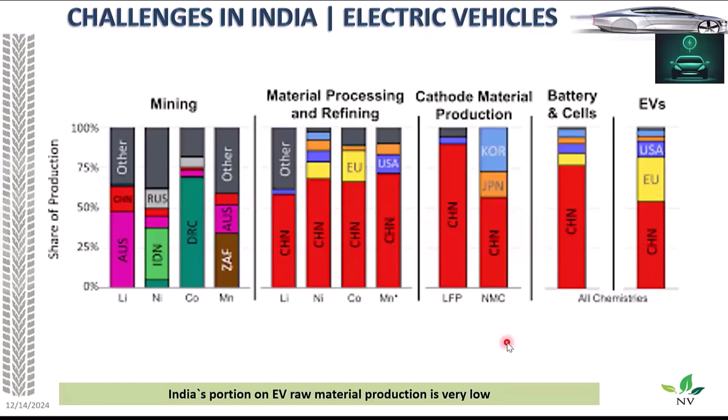Of course, in other aspects EV has a better advantage, but not in materials availability or content coming from our country. And from EVs there is also some pitching happening for fuel cells. We will discuss fuel cells in detail. In a fuel cell we also have a battery as one of the main components, and it requires hydrogen to run the vehicle, which is not predominantly available commercially in India for automobiles.

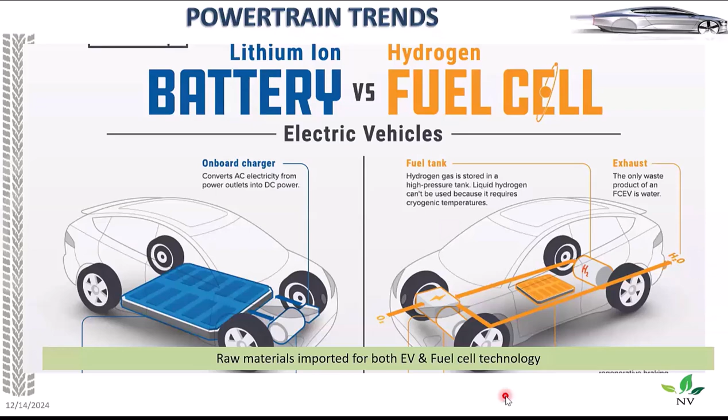And we also have the fuel stack, which is mostly rare materials again, and 100% it is not coming from India. So when we try to move from EV to hydrogen fuel cell, which is more green, are we there in India on raw material? It's again a big question mark. Whether we can develop the technology or the raw material for the fuel stack is also a big question. So let us summarize what we spoke.

We have the IC engine, the internal combustion engine, running on diesel and petrol. On the other side we have EV, and let us discuss five aspects: raw material, economic growth for India, the vehicle cost we purchase, and the total cost of ownership, for example if I run it for 5 years, where are we? As development or research activity, do we know this technology to develop it? And whether it's eco-friendly, because we are also speaking about pollution and air quality concerns in India.

So starting from raw material, as I hinted, we don't have most of the components, basically the battery segment of it. Of course, the chassis, materials, tires, tubes, we have it, but the main raw material of EV, which is ores, we don't have. But if you say 100% of ICE engine components, we have it in India. Let it be from smaller components to bigger components, from metal pieces to the chip portion of it, we have it in India.

Then economic growth: if I keep importing, is the economy going to benefit? Maybe earlier I brought it from the Middle East for ICE engines. Maybe tomorrow I'll get it from New Zealand or China. So this is what it's going to be. Probably we will do a small assembly portion of it, but it is not green yet.

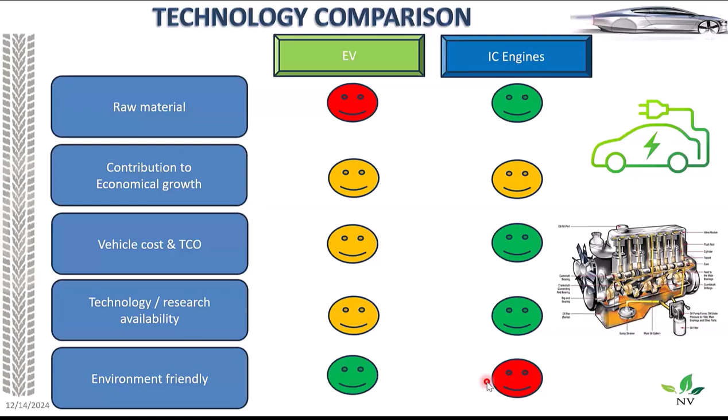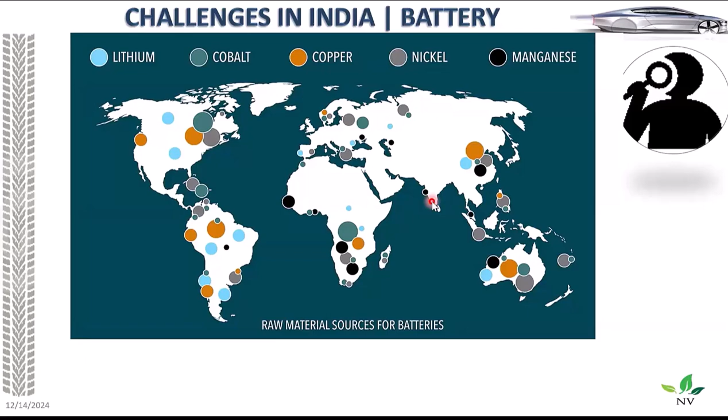So again, as we spoke, battery materials are not there, but this data says where they are. Slightly of manganese we have, to some extent. If in future we come up with aluminum batteries, we may have it. But the core materials that today are required for a battery are not in India. So they are probably coming from different parts of the globe. So this is where we have concern even in future for EV.

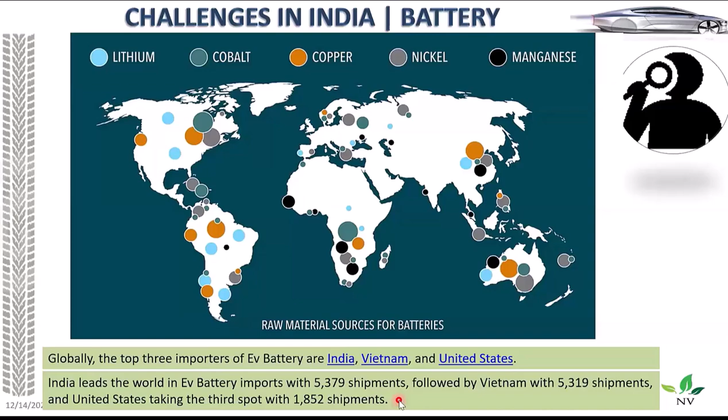If you see EV battery imports, India ranks top in importing, followed by Vietnam and the US, which means that we are again the top importers in the world for batteries. And other than this, we also have a lot of shipments coming from various parts of the globe to meet our today's electric vehicle requirements.

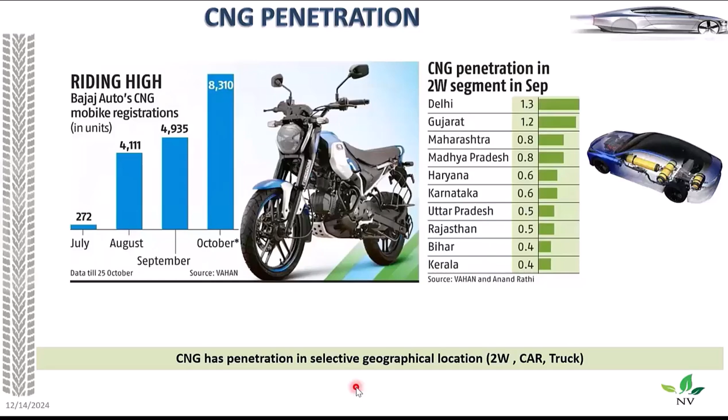On a lighter note, we might have seen that we are also slightly moving, from two-wheelers to passenger cars, to CNG. It is getting into pockets of the map. CNG is picking up, and the latest one is this particular two-wheeler. So it's a good sign, but the question is, are we having CNG as a replacement for diesel? I think this will take a long way, and we also have constraints in doing it. But yes, CNG is one which is budding.

Okay, so now we spoke about the challenges of fuel. We spoke that EV is good, but what is the concern with EV, and what the future is if you want to make it better. So now, what is India looking at to be self-reliant on fuels? We know we cannot become a Middle East country to get more oil. We cannot change it. So our government, under a scheme, is trying to see which fuel India can produce on its own.

So this particular Ministry of New and Renewable Energy, the MNRE department, continuously works on whether we can do something towards that. So they started a mission, and they also have a vision for it, and there is a clear target which they set, and there is micro-level activity which they are planning. For example, they have to start producing green hydrogen in a reasonable number from 2030, and there is also a plan for how to generate it.

We'll look more into it, and there is also very clear technology which they are aiming for to meet this particular requirement. Of course, it's not only the government, it is also the alliances coming from other parties. So this particular scheme is an initiative which has started, but this seems to be the kind of thing the government is banking on for the future.

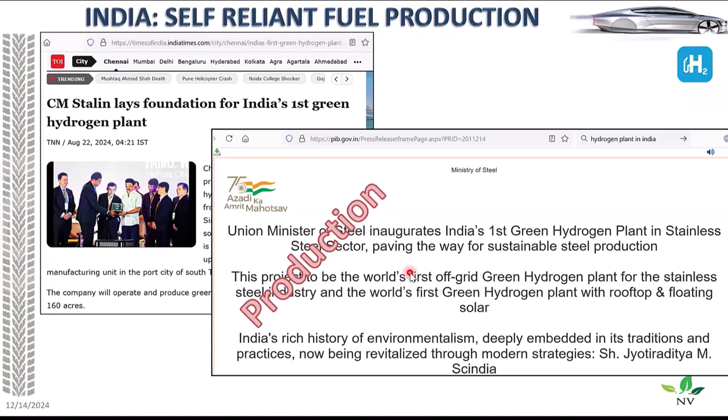But this doesn't end there, and we know the impact of what the Reliance and Adani groups are trying to make in India. Coming from Reliance, they have started a series of development R&D centers.

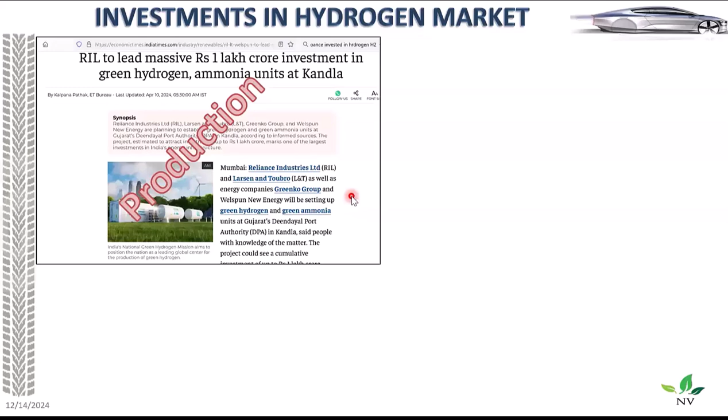They focus on two things. One is production of gases, second, especially green hydrogen gases. The second is developing vehicles so that they can run on green hydrogen. This has started from Reliance, and they have already started producing a set of vehicles in collaboration with other companies.

So now we are going to produce it, and fuels have stabilized to say, for example, closer to 100 rupees for both diesel and petrol. The promise, based on the basic understanding of this process and the investment, is that Reliance is promising they can give probably per kg of hydrogen at $1. So $1 is probably less than 100 rupees. This is something we can say is cheaper per kg if you compare, and it is very reliable for the future. And this is going to be 100% in India, not imported as it is today. So this is the promising content which Reliance has started contributing.

As I hinted, this is only one portion of it. Reliance has invested huge amounts, has technology tie-ups, and is also promising the government that they can deliver hydrogen at this cost.

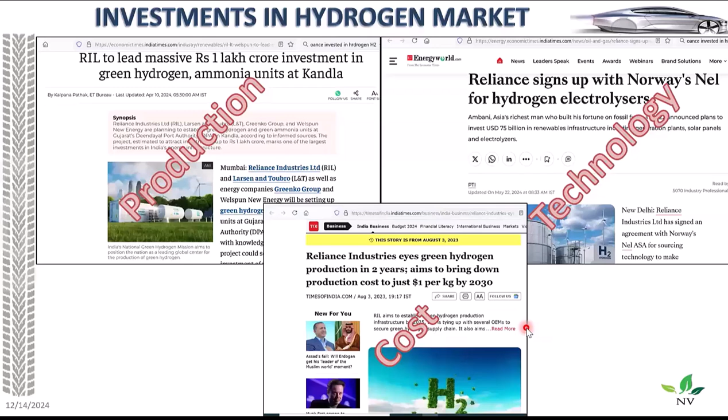On the other side, as I hinted, the other big player in the Indian market is Adani group. They also have similar plans, and have promised they will also be able to do hydrogen generation in India. So this is one case. In addition, since Adani has a lot of other businesses, they will try to use their natural gas plants, where they are already masters, to generate hydrogen.

So basically, hydrogen as a gas can be taken from various sources. We speak of green hydrogen, and on the other side we're speaking about hydrogen coming from natural gas. So various technologies are possible, and we'll also understand what this really means for production. This is a second player with a promising entry, and now these two are among the top businessmen working on gas and fuels for India. So this is where we see this particular supply is going to kick off, and we will have a self-reliant India.

Okay, so now coming to hydrogen, we know this is hydrogen, H2. So basically we are taking it from the electrolysis process, as simple as that. Say 2H2O with some energy, we can split into 2H2 and O2, and our area of interest is H2.

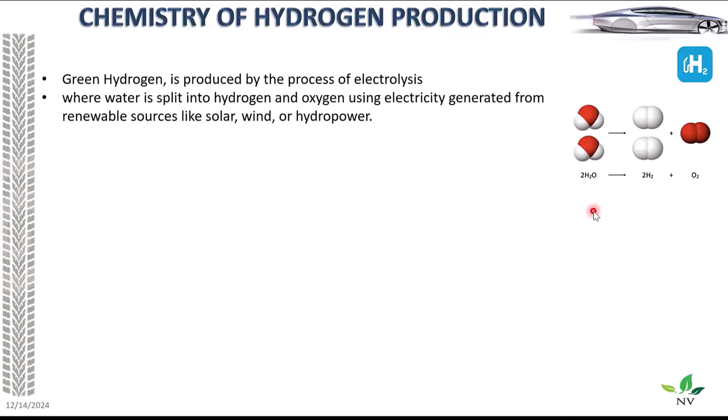This is basic chemistry which everybody is trying to work on, and this is almost the same technology which Reliance wants to procure from European countries. The reason behind it is efficiency. They need mass production and a high volume content coming from this particular electrolysis process. So the technology transfer is happening in the background.

So what is the aim now? For example, we get renewable energy because for the electrolysis process we need energy. Reliance is planning to set up yards where they can generate current from electricity from solar and wind, and the electrolysis process can do this job, but it needs energy. As I told, this particular tricky process where it will get a profitable hydrogen generation, this is coming from Norway for Reliance as of now.

So hydrogen will be produced, and this can be transported to any part of India in trucks. This is the area which they are working on, and probably this particular hydrogen can be used in various means for automobiles.

Key to notice, we know that hydrogen combustion can happen, and we have oxygen enormous in the ambient. So the end product is going to be water and electricity. So end of the day, in a fuel cell, it can be electricity or power, and we are going to use it for hydrogen engines. So the output is not going to be anything other than water.

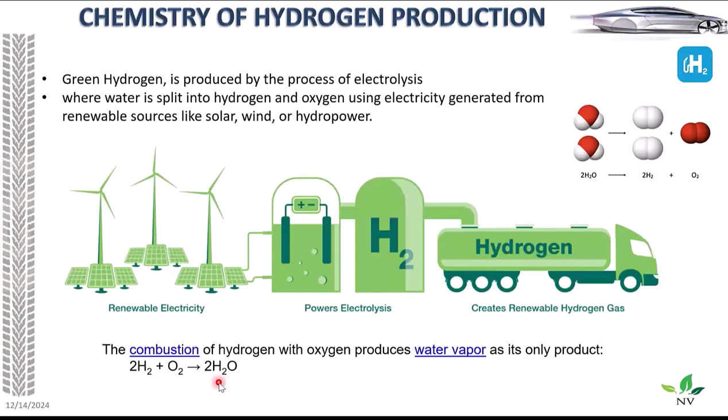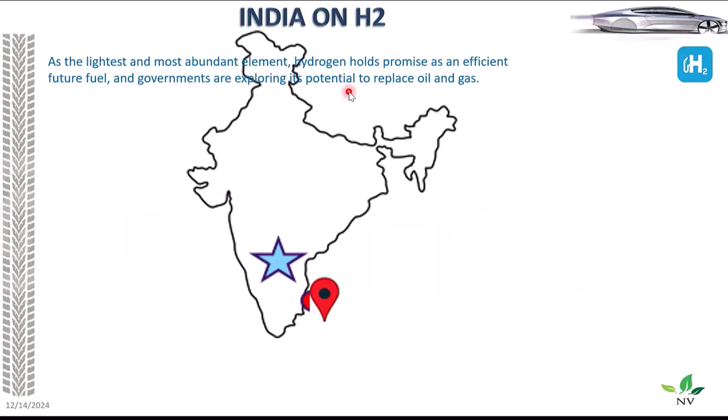Okay, so now coming to hydrogen, as I told, we are trying to explore it, and it is one of the potential ways to replace our today oil and gas requirement, or mostly about the import. And we already use hydrogen. We know very well, all our rockets are powered by cryogenics, and this particular concept is there for the rockets or for the space requirement. So we are not new to it.

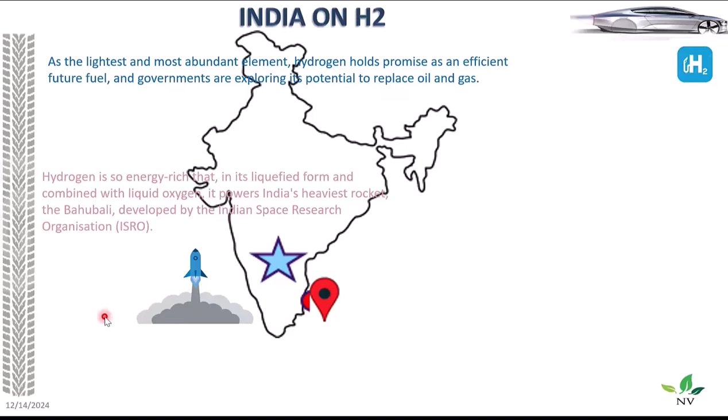Probably we are trying to migrate, or we are trying to use a similar modification for automobiles.

And coming to the properties, it's very important. The reason is this particular hydrogen is lighter, colorless and odorless. Why I'm hinting at this is, say we have hydrogen used for our vehicles, we are going to use it for day-to-day use. This colorless and odorless gas should be handled with care. And since it's a lighter gas, more lighter compared to other gases, especially what we use today for automobiles, this is going to have issues when some leakage happens. So this is one caution point, I will touch upon this later.

So now the question is, if I want to use it for hydrogen vehicles, there are two options. One is I can use it as a fuel cell, hydrogen powered fuel cell, or I can use it for hydrogen powered internal combustion engines. In principle both are possible, but the question is which particular technology is going to help, also for future sustainability from the raw material point of view, or from the economy point of view, or a scalability point of view. So both of these are competing now for the future, and the government has done some evaluation.

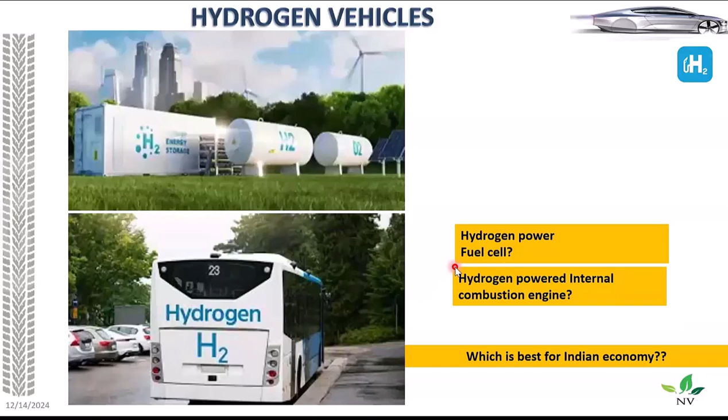We'll also touch upon that. Before going to what is the benefit out of it, probably you might have heard this from other speakers in the past, I'll try to touch upon it quickly.

So fuel cell is that we need hydrogen and oxygen. There is a fuel cell which is a stack available with a lot of catalyst inside. If we pass this through the fuel cell, then what we get is electricity, which can be used to run the motor, and as I hinted, the output will be water.

So this particular electricity will be used, like say, then after electricity comes in the vehicle, it will be like an EV. So now the difference between EV, electric vehicle, and fuel cell is, in the electric vehicle we will charge the battery. Here we'll have a comparatively smaller battery, and will fill the hydrogen gas. So on the go, if you keep filling hydrogen gas, this particular onboard generation of electricity will happen.

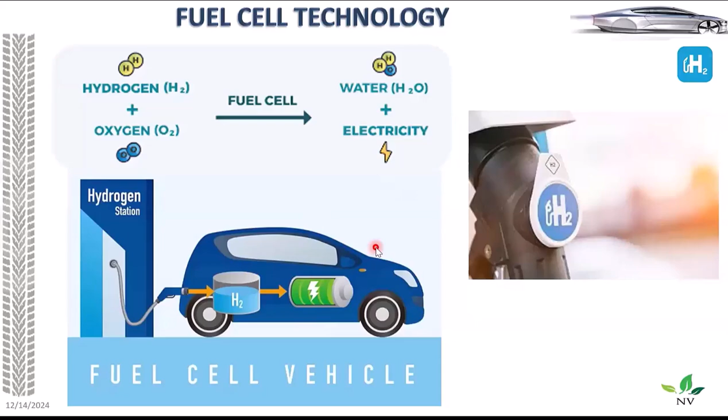This particular technology uses hydrogen, probably in future supplied from or manufactured and produced from India. But some limited quantity of EV is also built into the fuel cell. Of course, when hydrogen is available and we have better minerals for battery, probably this is one of the best options for the future. But it doesn't end there.

The complexity of the fuel cell goes slightly high. For example, I have hydrogen which can come from India, then it goes to a fuel cell where electricity generation happens. Today we don't have the technology or materials to produce it here, so it goes more as an import, but this can help in generating electricity.

The electricity will be converted to DC-DC, or it can be converted to AC based on the motor principle we use, and there will also be a battery to store it. So the generation goes to the battery, and electricity from the battery powers the motors driving the vehicle. When the battery drops voltage or we don't have energy in the battery, the hydrogen gas is again used to produce power.

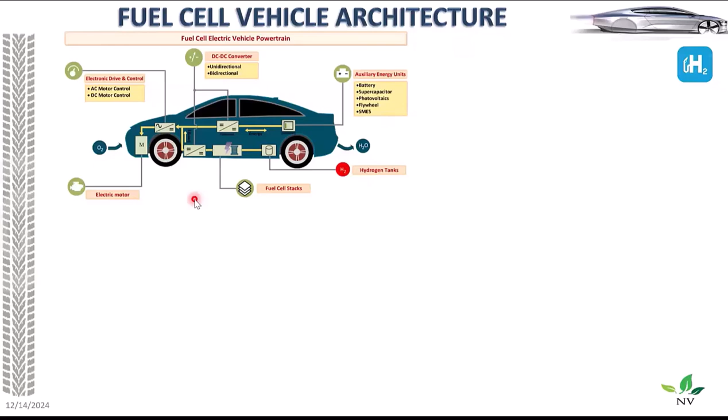That's why I hinted this particular vehicle is half a kind of hydrogen vehicle, but the other half operates purely like an electric vehicle. In some countries this is available at an initial level, not mass production, and mostly Western countries are going in this direction, seeing it as one of the promising options for eco-friendly vehicles. So with EV we keep charging it, but here we keep filling hydrogen and it acts as an EV - it's a hybrid of hydrogen and electric vehicle.

The West is more focused on it, and Toyota's product is one proven product which is commercially available today - a technology demonstration plus practical end-user application where it can be sold to the general public. But as I hinted, this is only an initial level of vehicle development, on a limited scale, which is still promising.

So what about India now? If we are able to bring this to India, probably when we have hydrogen, it's just a matter of having a better environment for control, and also better utilization of the fuel, which is hydrogen.

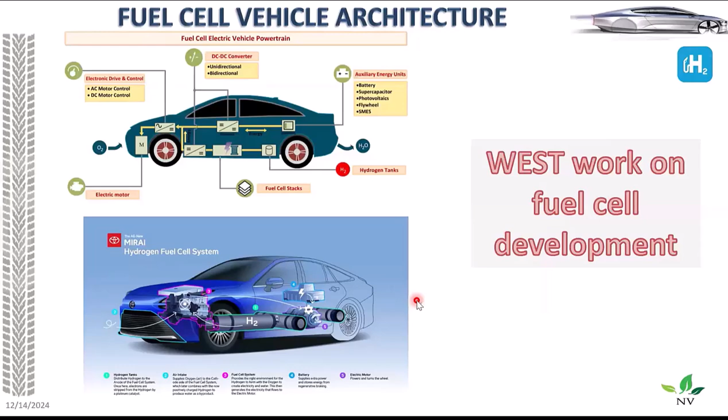I will not go deep into it, but I will quickly hint what this particular technology means. We have two things here - as I hinted, the basic chemistry is we need hydrogen and oxygen, and the fuel cell will convert this into electricity. The layout looks slightly complex, but I will put it in a simpler way.

The green color is the fuel, which is the hydrogen tank, and what you see in white on this side is the air - so air and fuel get in. We need some more for this particular synthesis, we also need some air, so we'll have a bigger size turbocharger like what we have today, and both contents go into the fuel cell.

What I'm highlighting here is the fuel cell, or we can say it's a fuel cell stack. This fuel cell stack is going to take both hydrogen and air together, and it's going to generate electricity. It also needs a level of control there.

So we'll have a microcontroller or onboard computer to regulate this whole process. Like today we have an engine control unit, in future we'll have a fuel cell control unit regulating it, along with other required sensors to monitor it. This fuel cell generates current, and this current can be used for the electric motors in the fuel cell vehicle to run them.

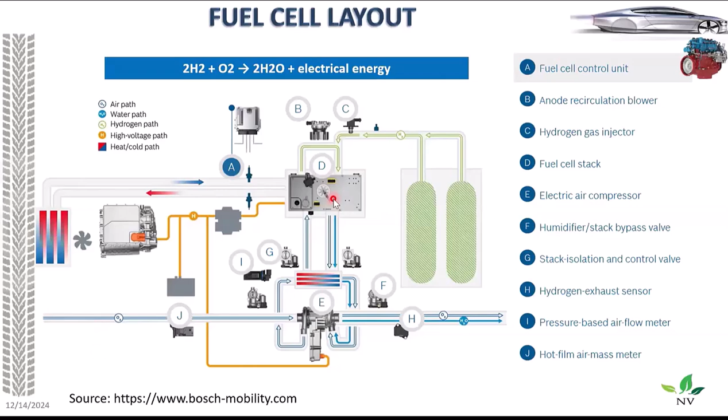But it doesn't end there - there are also other products in the market or in development which are able to realize this technology.

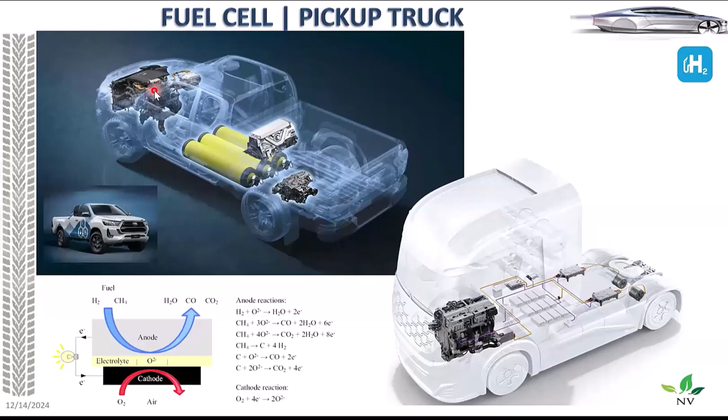If you see here, in this particular vehicle they are trying to place a tank on the bottom side of the chassis, and the onboard generation, the fuel cell, is kept at the front, in the bonnet of the vehicle. Here the electricity gets generated, and later this electricity is sent to the wheel motors to propel the vehicle. So such things are already there, as I hinted, in development and also a few models in production. A similar thing is also in process for bigger vehicles.

Today we can say EV is there for the future, but do we have such big batteries, or can such big vehicles be powered as electric vehicles? This is kind of a big question mark today. We will see why we have concerns with bigger vehicles. But today there is also development going on. It's not in production, but there is development and research going on.

That is, to use a fuel cell for bigger power vehicles, probably 300 to 400 HP vehicles. So how to power up such massive vehicles and run them? If not EV, then what else? Then the answer is fuel cell electric vehicles. As every product has both sides, plus and minus, the hydrogen fuel cell advantage is that it's renewable. As I told, it's clean, green, and we can charge it fast, which means the gas can be filled in 10 to 15 minutes. But you know how long an EV takes.

I have an experience with a commercial vehicle, a bus running from Chennai to Bangalore, one EV bus; it's only one company which runs it. They need at least 30 to 45 minutes in the middle, close to halfway, to charge the vehicle, which means they cannot operate AC, they cannot run the vehicle. For sure, they have to take a break for charging. A fuel cell will not have such an issue, because gas filling will probably take 5 to 10 minutes; fill it and you can continue.

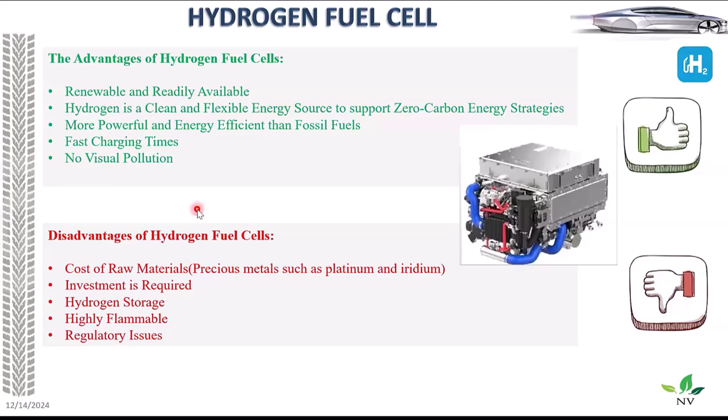And storage is a concern, because this also is still not at a mature level. Hydrogen is very flammable, and we need regulation coming from the government on how to use this. So all this is still in the initial pipeline. It has a long way to go, but there are a lot of advantages in it, and development is going on towards this. Probably after 5 to 8 years you can see some changes in this area. Okay, so we spoke about EV advantages and did a comparison with diesel. Now our government is thinking about using hydrogen as a fuel for fuel cell vehicles. So where does this lie compared to EV?

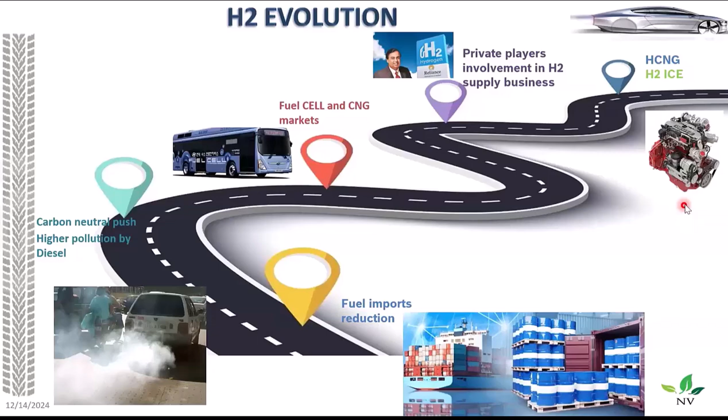The reason is, say, for example, we have fuel cell here, hydrogen is there, it doesn't end. The reason behind it is the engine. As I hinted, we know what an engine is and we are self-reliant in engines. So anything where you use the engine again and not pollute the environment, I think this will be the best solution, which government thinks. So we are speaking about producing fuel in India, which in this case is hydrogen.

So now we have to understand, like we have petrol, diesel, kerosene, CNG, LNG, hydrogen also has varieties. We call it gray hydrogen, blue, green, turquoise, kind of blue again, and brown hydrogen. Basically these colors come from the way hydrogen is produced. If you produce hydrogen from methane, it's called gray. If we produce it with carbon capture technology, CCS, then we call this blue hydrogen.

As we hinted, if we use electrolysis where the current is coming from wind or renewable energy, and we use the electrolysis process from water, then it's going to be green hydrogen. And as I hinted, this is the only renewable or best mode of hydrogen, but we cannot expect too much output of green hydrogen. The reason behind it is the efficiency of electrolysis. So green hydrogen is good, but from a scalability or mass production point of view, we have to think about it.

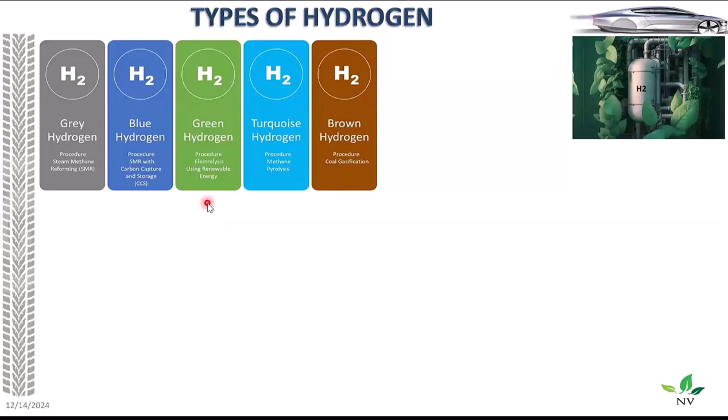And methane and ethane are all there in India. So the question is, from the methane plant, can we extract hydrogen? That's where turquoise comes into the picture. And our coal production, whatever we have today for electricity generation, you can use that also for gasification and keep producing hydrogen. If I produce it that way, we call it brown hydrogen. So probably in future we may have different colors of hydrogen selling in the market. We have to wait and watch. But government is more focused on having a share of green hydrogen compared to others.

So as I hinted, at least in India, practically there are three. One is green, because we have water, we can have electricity, and we are able to extract better from electrolysis. Blue hydrogen is possible because now India has natural gas sufficient to some extent. This can be used for hydrogen. So blue also seems to be an alternative. And natural gas is there, and there is a plan to increase this share. Probably in future, since we import, say for example, one from Iran, one from Dubai, and one probably from Russia.

In future, we may have a different kind of plants which will be supplying hydrogen. So today, what is it? Government is not clear because technology is still evolving. Probably it takes another 5 years to understand which is the best for future.

So if we say we need green hydrogen, we need a kind of megawatt plant of solar photovoltaics, because we know we are in a geographical location where we get better temperatures and light. So this was one of the main areas in which green hydrogen can go further. And electrolysis is a simple process from water, so we can depend on this as one of the main sources for hydrogen.

And if it is green hydrogen, we can call it renewable energy. So we are not going to pollute too much. But if other hydrogen comes, we have to see what is going to pollute. Say for example, green hydrogen can meet only 50% of need. For the other share we probably have to go to gray or brown. So this is a key message. But which will click? This is a big question; as I hinted, it has to progress.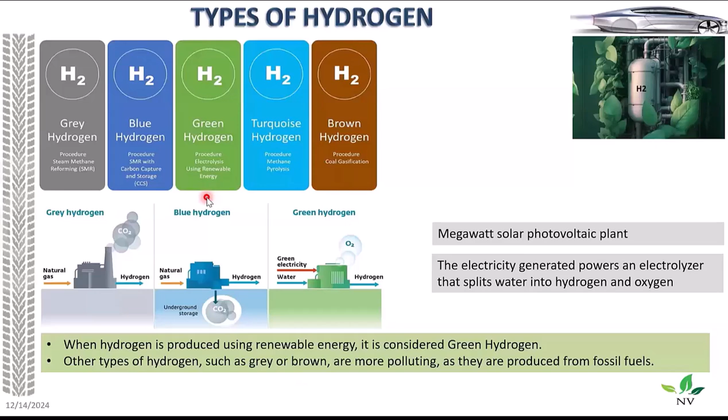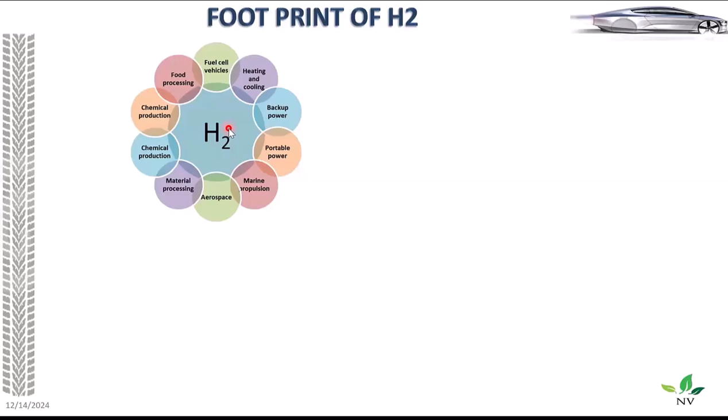Okay, so today, it's not like we are only speaking about fuel cell or electric vehicles or aerospace for hydrogen. Hydrogen is also used today in other areas like marine, heating units, food processing, chemical production, and also, as I told, rocket launches. So we are not starting from zero, but we don't have 100% capability to meet the hydrogen requirement for future.

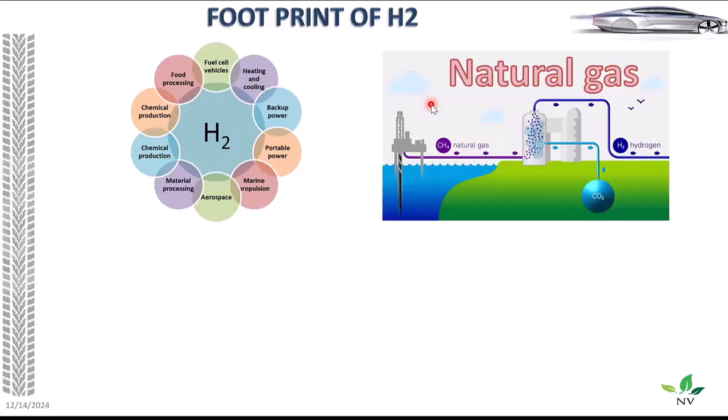So natural gas. As I hinted earlier, Adani groups are trying to focus a lot on it, and Reliance also has this particular technology available. So they want to use natural gas for hydrogen. This is one way forward. And there are also plans from government to go by solar and tidal power.

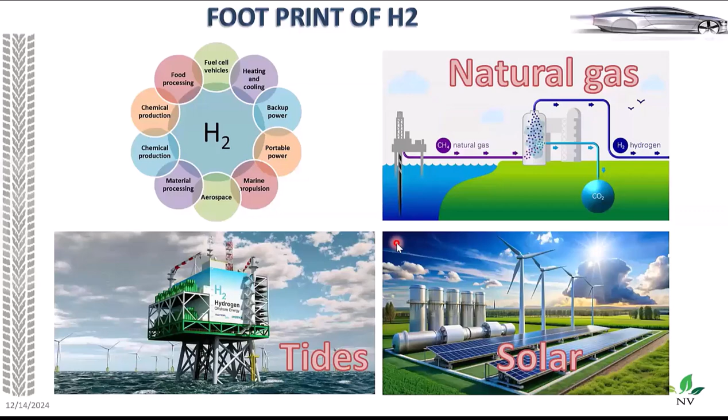There is a plant in Leh which has been producing hydrogen since 2023, and this plant is also supplying hydrogen for vehicles running in that area. So now hydrogen will be produced. This infrastructure has to be spread everywhere; today we have fuel stations, there should be hydrogen gas stations. This infrastructure is not yet developed, but it is developing.

For example, there is a story that in Delhi, if you fill 30 kg of hydrogen, you can fill it in 10 to 12 minutes of refilling time, and this is sufficient to cover a day's running of city buses.

So this is promising, but very important to note is that hydrogen is stored in carbon fiber tanks. We'll understand why later. There is also a density problem with storage. This is one of the key messages. So most of what I told is for 2030 mass production. But it doesn't end there, and government doesn't simply have an ambitious target of 2030.

There is already a tie-up, as I told; Reliance has done it with the government and has invested hugely in this area. They are planning to convert 5,000 diesel trucks running for Reliance in Jamnagar and across India into hydrogen-powered trucks, like the truck shown at the bottom. This truck is from Leyland, but Reliance took this project and is converting it to hydrogen.

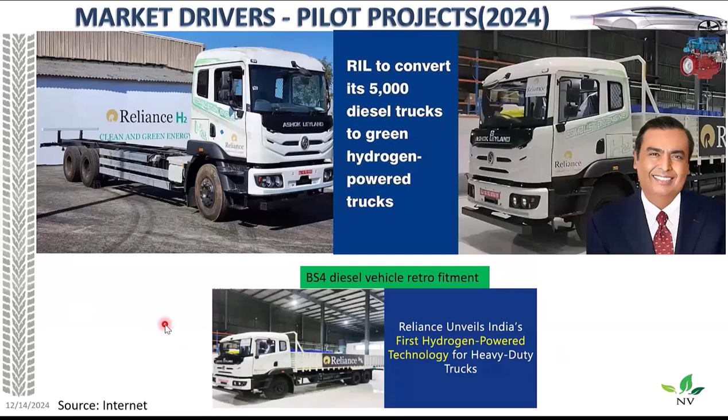So this is no more a nightmare or a technology which will come in the future. This particular vehicle you can see is already developed, and the test runs are going on. A good number of vehicles are running. So this is a pilot project from India, and it's a first pilot project. The other guys are also following. Like Tata is also working on it, and other companies also have hugely invested and they are working on it.

Okay, so now the target for government is to use the engines and do a retrofitment. So there will be a tank, a blue or a green hydrogen, and this is going to power up the engines, and this is going to be the retrofitment or a future technology for a vehicle. But the question is, how popular or great it will be.

As I told, this is 2021 data. The electrolysis process gives only 4% of the requirement of hydrogen, which means that the other sources of generation are predominant here. But if hydrogen electrolysis is going to be a bigger hit, I think in another 5 years we will have technology, we will have raw material, we'll also have fuel from India.

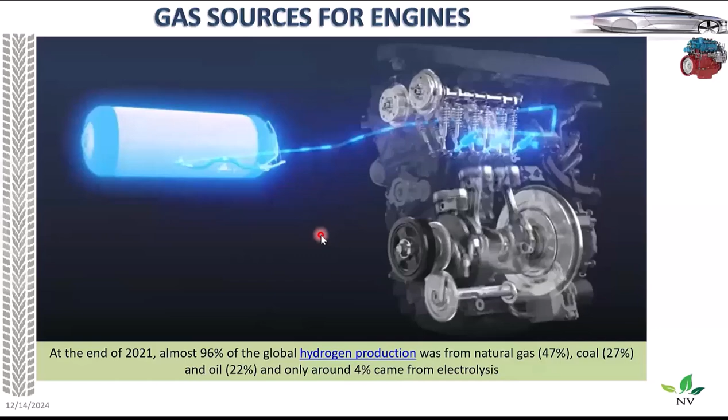Okay, so now we spoke about a truck which Reliance has used. We'll go slightly deeper into how this hydrogen is used in today's vehicles. So hydrogen will be used as a fuel for the combustion engine, and this combustion is going to give thermal energy, which will be used for powering up the vehicle. So this is the basics. Reliance is taking this basic as a core and they are working on it.

So hydrogen will be coming from the Reliance plant. The combustion engine will be a Leyland engine. They will do engineering on it, and the engine will be modified for the hydrogen requirement, and this thermal energy will be used for running the trucks, and the emissions in this case will be water. So literally, if you touch the pipe, there will be droplets coming out of the bigger trucks as the byproduct. So there will be no carbon, no smoke, nothing. It will be only water.

So this is the basic thing which they work on, and they consider this will be the CO2 neutral or green trend for India, especially for bigger vehicles like buses and trucks. This will be not one technology, but more about the only technology which can power them in future because of the EV limitations in bigger vehicles.

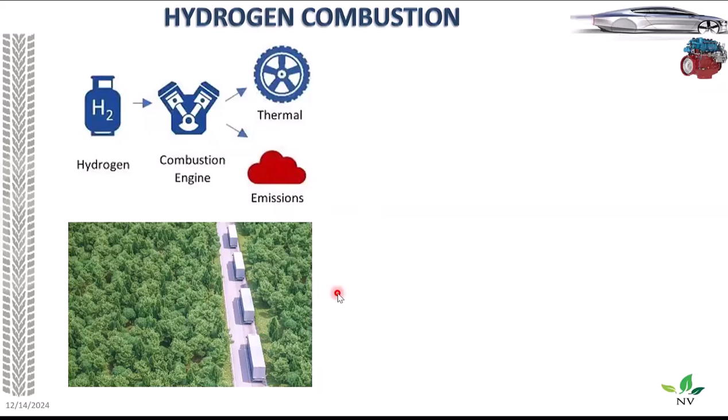So we are now speaking about combustion engines. Then we have to get into combustion and also the mechanical portion behind it. So the stoichiometric ratio of hydrogen is one of the key factors which will play a role in running the vehicle. This is slightly different, and the world is also trying to see how to use it. Now we have port fuel injection and direct injection. Both have their own limitations, but both can help in using hydrogen as a fuel for the vehicle.

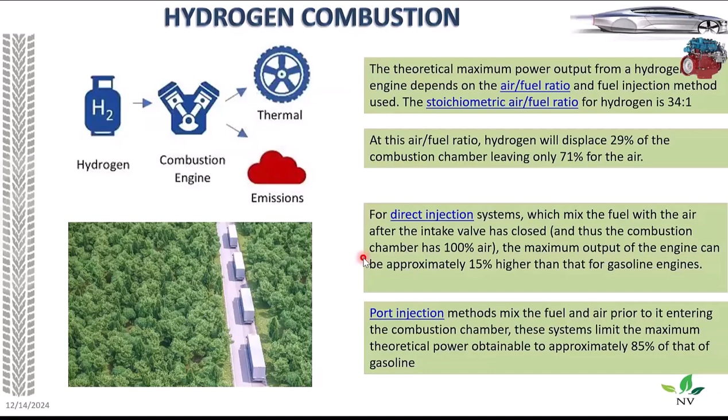So as a stopgap, as I hinted, electrolysis for India is very low today. Today, whatever fuel we are using, there is an ethanol blend which they are already using, which means that our diesel or petrol is already blended with other alternate fuels. So this is a practice.

In a similar way, the government is thinking, if I cannot make 100% hydrogen, let me make HCNG, which is hydrogen plus CNG put together. So it's a mix of hydrogen and CNG. Both will be powering up the vehicle till we get pure green hydrogen alone.

So CNG, we know it is getting produced in India to some extent, and hydrogen production has started. Both of these are promising, and they say there is a short-term goal and a long-term goal. The government sees the short-term goal for hydrogen will be not only hydrogen, it will be hydrogen plus CNG. The long-term goal will be pure hydrogen. So blending is in progress, or the thinking process goes in that direction.

Once we start with some initial level of production of hydrogen, we will start running the vehicles with HCNG, which is CNG plus hydrogen. So as I told, this is not new. Today we already have E5, E20 fuel in our fuel stations, which is ethanol blended into our existing fuel. So this has started in a similar way. Hydrogen along with CNG will be the short-term goal.

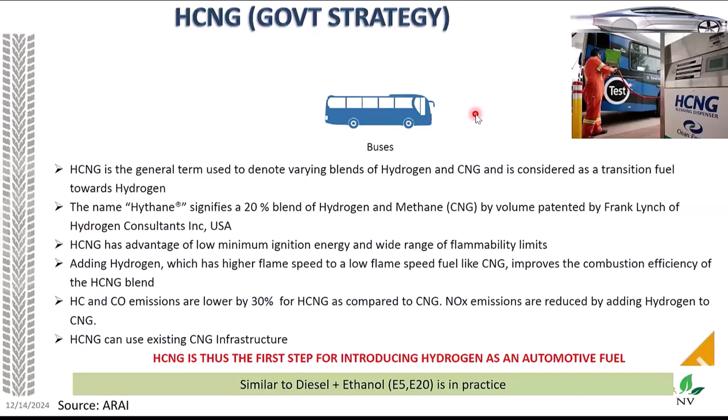Okay, so we spoke about investments and we spoke about some technology. Let us go into hydrogen from a research point of view, how hydrogen can help in our development, do better research, and how we can be self-sufficient in making hydrogen engines. So before going there, let us understand what hydrogen is. Let's compare it with the other fuels we are using, for example CNG, gasoline, and diesel.

So hydrogen, you know very well, does not have any carbon content, but the others have carbon. This is one of the killers in the market, where diesel and gasoline are polluting the environment. In a similar way, we can see the energy required to burn hydrogen is very low compared to the others. But the more catchy point is the stoichiometric air fuel ratio.

So hydrogen can run at 34.5, which is 3 times what we are running with today, say, diesel. Hydrogen can produce 3 times more energy, which means I can get 3 times more mileage. For running the same distance, if Reliance is going to give it at $1 per kg, as I told, I'm going to get 3 times better mileage theoretically. So this is where we can understand why everybody speaks about hydrogen.

We are speaking about 5%, 10% fuel efficiency benefit in various technologies today. With hydrogen power, I'm going to get 3 times better, which means 300% better efficiency. So if I'm going to get 300% efficiency, now understand why the government will focus on this. So this is the green side. Of course, everything has the other side of the coin.

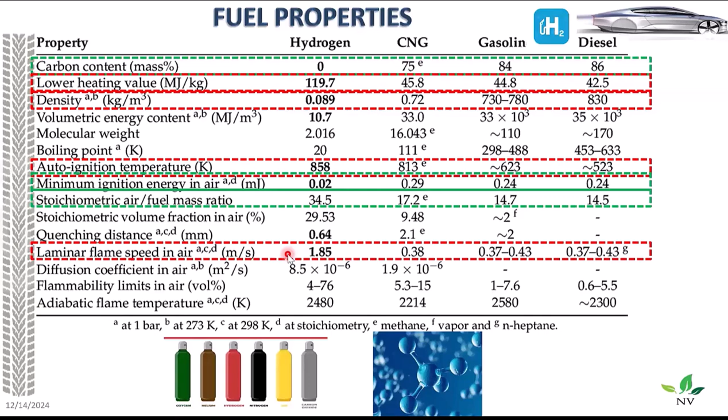And the flame speed is very high. A small mistake is going to cause higher flames coming out of the engine, a risk to public safety. So this is one of the alarming conditions if we are going to use hydrogen. Okay, so let's see.

As I hinted, for heating value, hydrogen can give 119.7 megajoules per kg, which means I'm going to get 3 times the mileage. And it's not only mileage, I'm going to get zero carbon. So this is the top portion the government sees as promising for the future, and that's the reason both Adani and Ambani groups are investing in this, and this is going to be a big advantage for India and also from a business point of view.

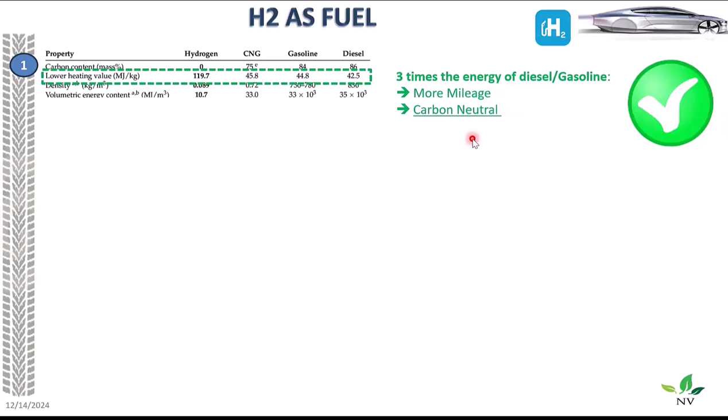So the stoichiometric ratio: today we know for diesel it is 14.5 and for hydrogen it is going to be 34, which is 3 times more, which means I need 3 times more air to burn the fuel. Today the market runs with naturally aspirated engines. Naturally aspirated engines probably cannot be used in hydrogen vehicles, since I need more air. Turbocharged vehicles are required to power hydrogen.

Of course, we can power this with a bigger turbocharger, but as I told, we are going to get more mileage. So probably the naturally aspirated portion will not be huge. Today, the bigger or higher power engines are all turbocharged.

So it's not going to be a big deal, but we put a bigger turbo, about 3 times the size of today's usage.

The third point, as I hinted, is the minimum ignition energy. It looks simple that it needs only lesser energy compared to others to burn, but you may have a problem. This particular fuel gets burnt on its own if you have a higher temperature somewhere in the combustion chamber, or a hotspot, which means that wherever the engine is hot, it will burn on its own. I no longer need to control it, so this is a hazard for us.

Cooling has to be made very efficient compared to today because of the higher calorific value of hydrogen. You can see other fuels are very, very low on this aspect. So this is a unique, or a problematic, content property of hydrogen which has to be taken care of in development.

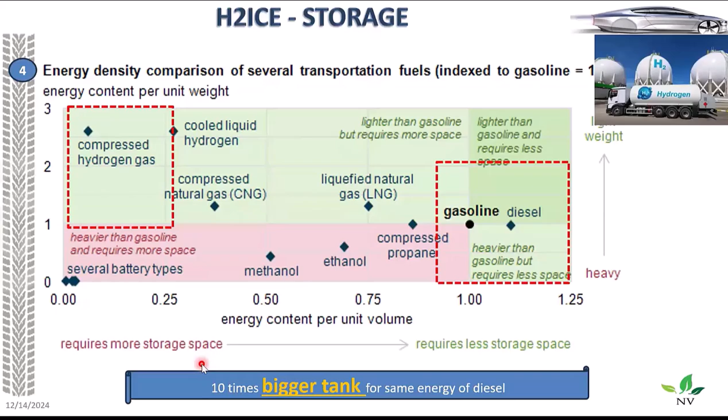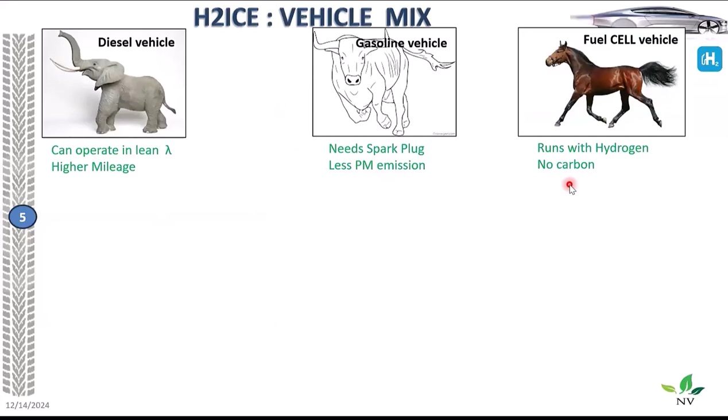So we spoke about fuel - now we know its properties, we know the plus and minus of it. Now, how do we do combustion for this? Diesel operates lean and has better mileage. Gasoline uses a spark plug and doesn't have too much emission. Fuel cell runs on hydrogen, no carbon. So where does this hydrogen powered internal combustion engine, H2ICE, fit in?

This engine is going to have all three. This is a peculiar new age engineering that is going to happen. This vehicle will have a lean lambda, it will have a spark plug, and it will run on hydrogen. This means the technology is not simple, and the automobile powertrain or engine industry is going to face a high level challenge here, and this work has already started. We cannot call this a diesel engine, a gasoline engine, or a fuel cell - it's a mixture of all three.

Now we know that even for a small change of fuel or alteration of mixture, we do a lot of research, materials management, thermal management, and engine design. This tells us how much work is needed to make hydrogen a fuel for IC engines. That's a huge amount of work available, and that's the reason many are not working on it. But in India, there's a prime focus, so somebody is working or planning research on it. As I hinted, this is a key area with future potential, and setting up this research will have multiple things to do for the next 10-20 years for sure.

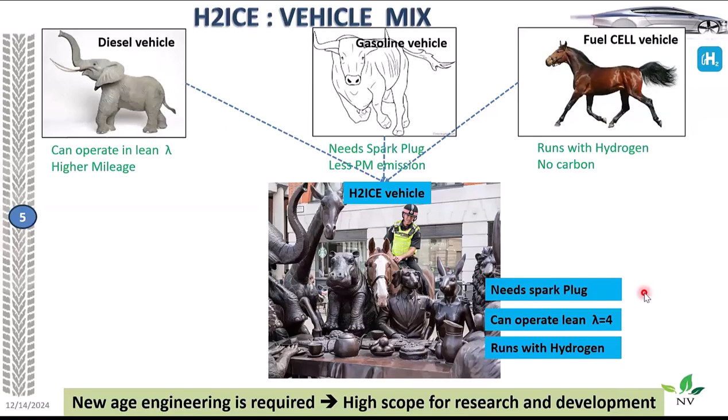So if it's a mechanical or automobile engineer, key things to work on for research include the compression ratio. As I told you, hydrogen is not going to be a diesel engine, it's not going to be gasoline, it's not going to be a fuel cell, or an EV - it's a mix of all. So the compression ratio has to be matched. We need better materials which can withstand this particular 3 times higher calorific value. Valve timing and cooling has to be worked on.

From vehicle performance, this will have a closer match to diesel or CNG performance. And fuel injection, there is a lot to work on because the change in the engine is the fuel. So type of injections, timing studies, probably varying the engine properties - that's a kind of research activity if somebody is interested to take up.

And ignition is one key. As I told, the minimum energy required to burn hydrogen is very less, which means if I put a gasoline or petrol spark plug, it's not going to help hydrogen, or it could have an adverse effect on combustion. So for the ignition coils or energy required, though hydrogen has a spark plug, we may need a low energy spark plug, as simple as that.

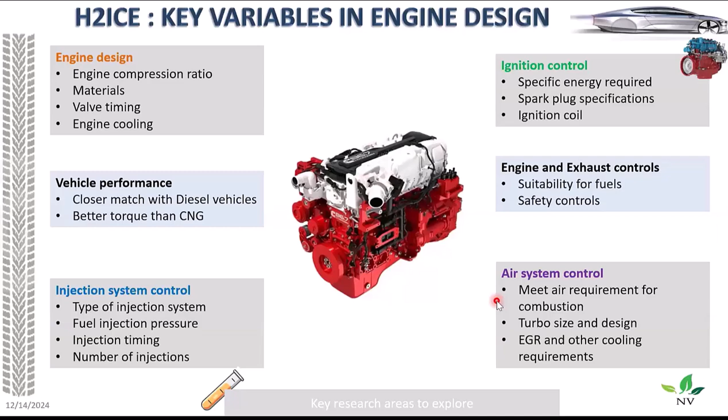Engine and exhaust controls, I will touch upon in future. And we need bigger lambda, which means bigger turbocharger, bigger air inlet, and bigger size of air handling engine. So if there is an idea of developing an air system for the engine, you can think about 3 times more air system has to be developed for that particular engine.

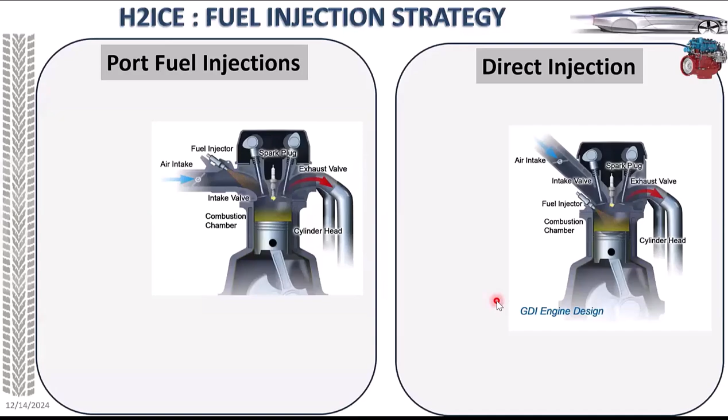Quickly onto the known technologies, like port fuel or direct injection engines. If you want to use hydrogen and go for port fuel, probably you get like 28 kilowatts per liter, which means compared to diesel I'll get low power. So if you want low power, go for port fuel injections. If you need high power, you go for direct injections.

Port fuel injection also has advantages and disadvantages, because everything has two sides. Port fuel is easy to develop, easy to control. It's been in India for 20 plus years as a technology, but there can be backfire and low charge, meaning low power. So we have to work on such content, but this technology is there in India, can be easily realized, and many are working on this in the first phase or pilot projects. This all runs with this port fuel type.

Long term, direct injection fuel injection bikes is all recent days happening even for diesel and gasoline. So hydrogen has a better advantage. If you need high power trucks, then we have to go for direct injections. If we go for that, we'll have better backfire control and better charge because we are injecting directly into the engine or combustion chamber. So charge will be very high, and I can operate at better lambda, which means I'll get better mileage. We can control the combustion better, and this is already known in the Indian market - we can do better combustion with pilot, post, and main injections.

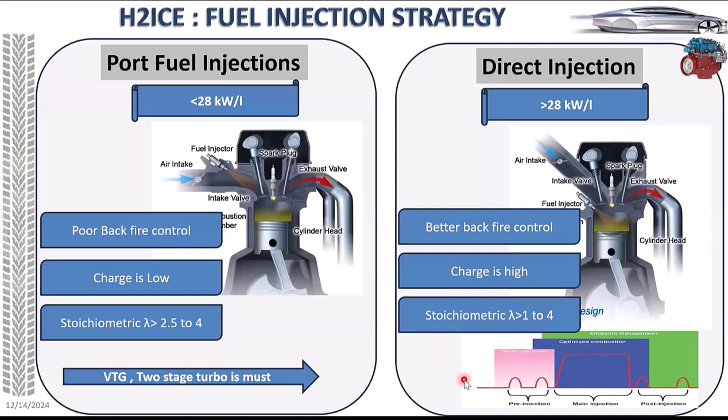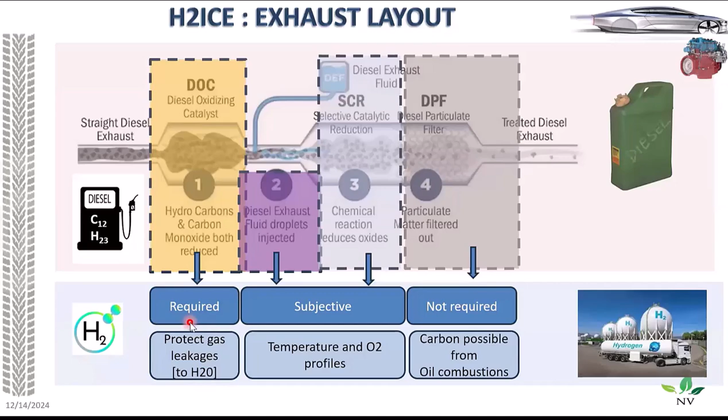Coming to the exhaust after the engine: today if you see a typical truck, it has a DOC, SCR, DPF and other things to handle. Probably in future, if I go to hydrogen, I may not require everything. In fact, because I don't have carbon in hydrogen, I don't want SCR and DPF in the picture. Probably I need DOC - the reason is if leakage happens, this DOC can help convert it to H2O. So this is not for emission, it's for a safety reason. Future hydrogen vehicles probably will have one DOC for safety purpose, which will convert hydrogen coming into the DOC to H2O, so it doesn't go out and become a flammable content.

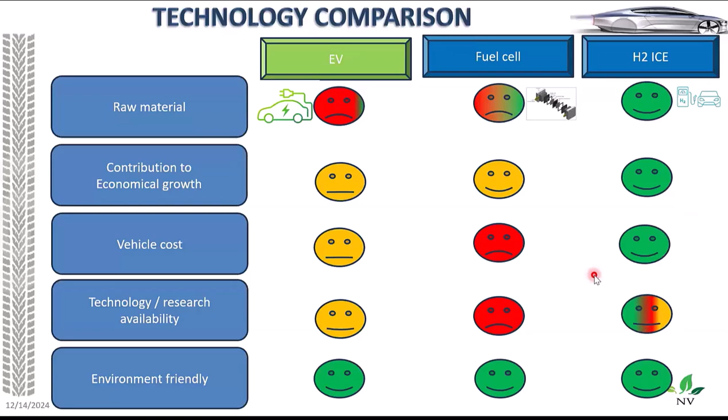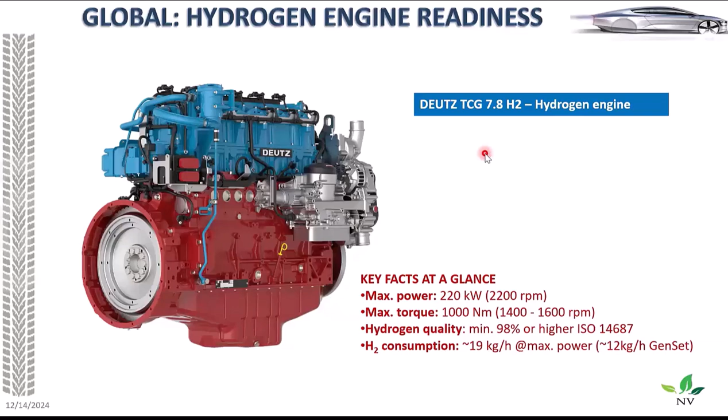The world is also working on this. There is one engine from Deutz which is ready to give 220 kilowatts. You will see a massive engine which we can run on hydrogen. This is already there, which shows that we are also going in the right direction.

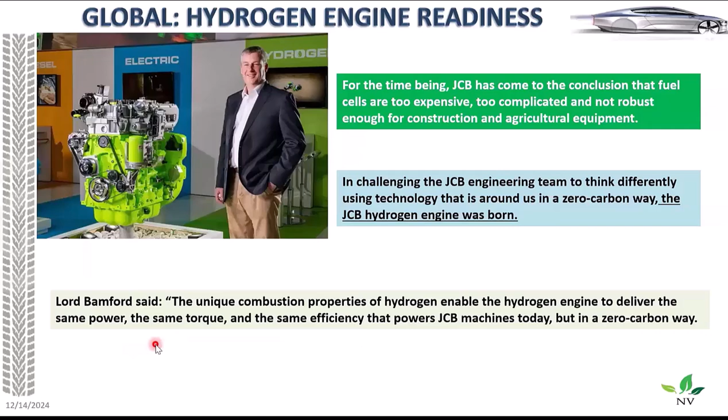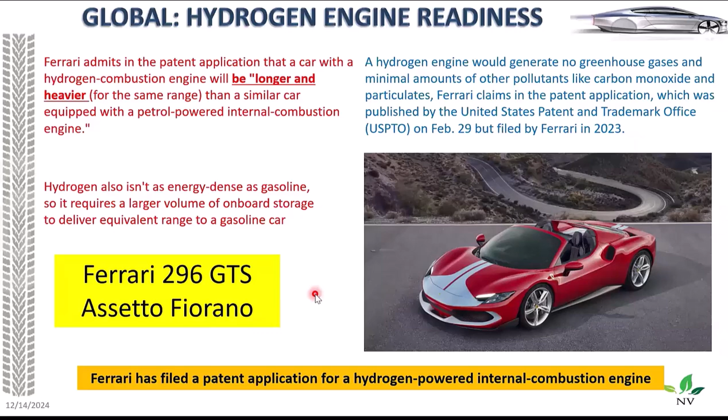The only thing is this is slightly heavier, they say, compared to others, because we are going to have bigger tanks and slightly higher power coming out of it. But when we say from India, I think this should not be a big concern. So Ferrari's patents are filed for a car, and they have a vehicle running with this. This clearly shows engines can be powered by hydrogen.

So quickly, let's see how a hydrogen engine looks. The center portion is the hydrogen. There will be a content where you have direct injection and a spark plug. Let's see how it works.

Green is the hydrogen tank, which supplies the green hydrogen, marked in green color. On the other side, air comes from the ambient atmosphere, which is free, and it can be sucked in and sent to the engine. So fuel is green, air has been reached, and combustion is ready once the spark is ignited by the spark plug. After combustion, it goes to the regular route of exhaust gas treatment, and this is how it works.

Basically, if you see the technology, it looks simple, and that's the reason it's getting realized. There is also a high explosion risk category involved, so we use a kind of monitoring system to control whether the combustion is safe and the engine is safe. We are using a lot of machine learning models here to monitor the engine so that it doesn't get damaged and this gas doesn't harm others.

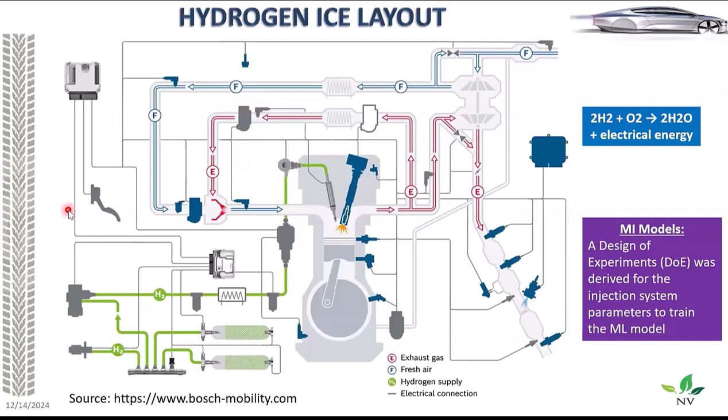This is how the initial work is going on. For combustion, there are four topics that people may work on in future. One is engine design, so that it doesn't have a hotspot. If a hotspot is there, without spark, the hydrogen will burn because of its ignition limits. So backfire and misfire is going to be a bigger topic compared to diesel or gasoline.

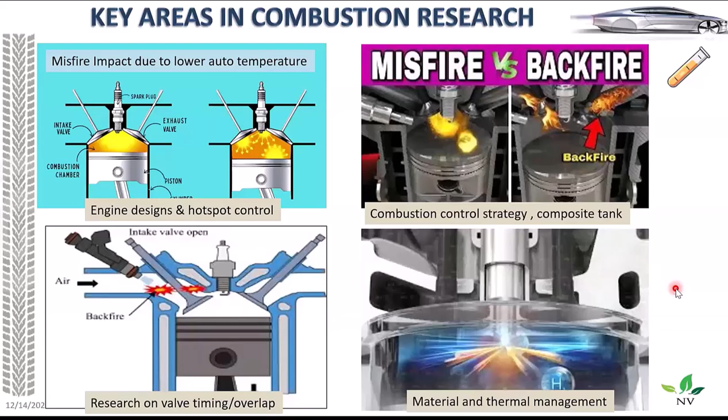We can work on technologies for how to avoid misfire or backfire. The valve design and valve overlap, basic engineering has to be reworked because this requires slightly different valve timing. If there's valve overlap, gas comes out in the exhaust pipe. And material management has to improve because of the 3 times calorific value, so we cannot use the same material we use today, and the temperature coming from this 3 times higher calorific value will also be high. This is the fourth research area ongoing which somebody can take up.

Finally, we spoke about hydrogen being dangerous. We have to work on this - it's easily combustible, has higher flame temperature, and 3 times higher energy compared to diesel. So the government has started working on legislation for this.

So maybe on a lighter note, we know what hydrogen bombs are about. We might have heard of them. So if something wrong happens in the combustion, this is going to damage the entire engine. Yeah. So the higher flame velocity is going to kill the engine. So there should be better control of the combustion. So this is the first and foremost target.

And we have a lot of monitoring models that we have developed, which say that anything going wrong on visual or supervised data coming from the engine control unit, these two things are going to be the main monitoring points for running the engine. So we will have a lot of AI and ML models in the hydrogen engine, and if somebody has to work on developing a model, probably this is the right time to work on hydrogen.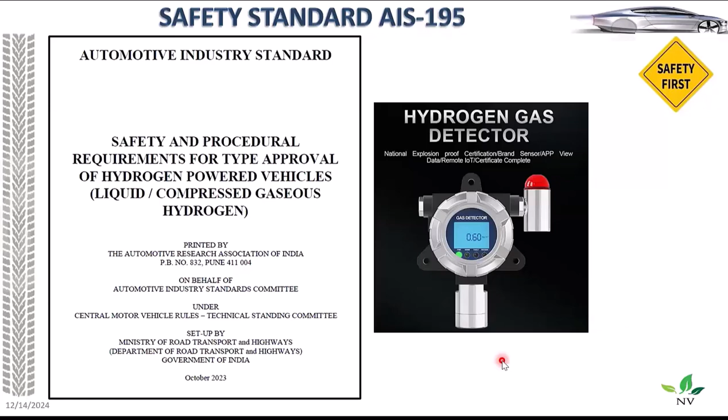Yeah. So higher flame velocity is going to be a safety concern, and we have to work on it from the safety point of view. So the government has now come out with a draft Automotive Industry Standard 195. This standard is available free of cost, and I will also show a link where it is available. This regulation comes from ARAI, the Automotive Research Association of India. Basically they emphasize a few safety conditions. This is one gist of the complete legislation. They are saying that if anything leaks, you have to take care of it. So crash safety, regular leakages or component damage, everything.

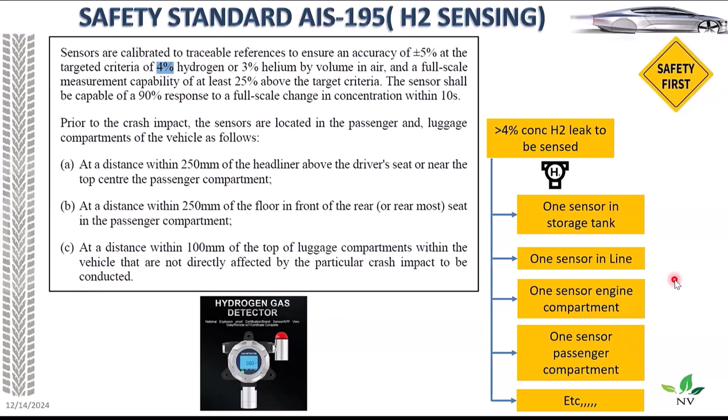So what we are trying to do nowadays in development is put one hydrogen sensor in the tank. If it leaks, it should be able to detect it and shut off the valve. One on the line, and a third one in the engine compartment, in case any leakage happens because of misfire, valve overlap or some component damage there, and one for the safety of the passenger. So the four sensors are going to take care of safety. So if safety is done, I believe vehicle combustion is ready, technology is ready, and fuel is also getting ready. Okay. So we are not speaking about direct implementation to all vehicles.

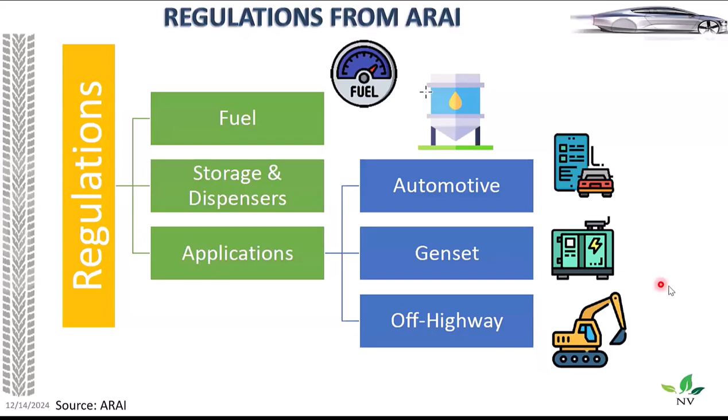As of now, the government has realized that gensets or off-highway will be the major usage of this. So they have given legislation mostly for gensets and off-highway, on how this hydrogen requirement should be fulfilled. These regulations have come from ARAI. That's the primary focus. The idea behind it is that we anyway have to take fuel and fill it in the genset. Probably a gas-powered tank can help, and safety is not a concern because gensets are not kept close to humans. Yeah, so that's a key focus.

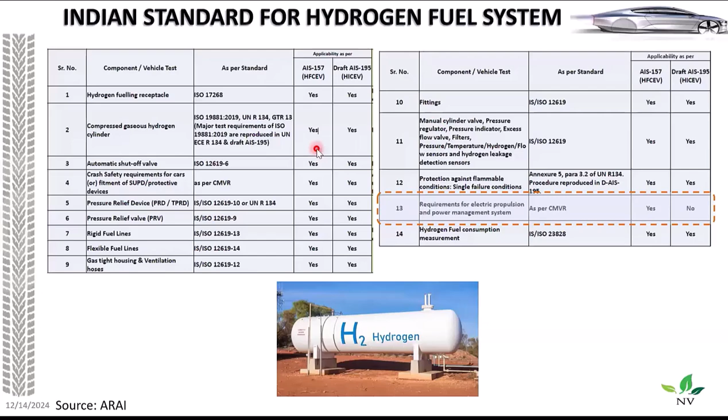And there are a lot of legislations, standards which the government has released. It has a lot of components, and for each and every component there is a legislation. That's the key message. So if somebody develops something, you can refer to this document. You can type it in Google and you'll get this AIS 157. It will tell you what the legislation requirement is. If you say I'm going to develop a tank for this particular vehicle, or I'm going to do research on it, there's a legislation on it, so you can understand what the requirement is. This is available in Google. AIS 157, if you type it, you will get these documents.

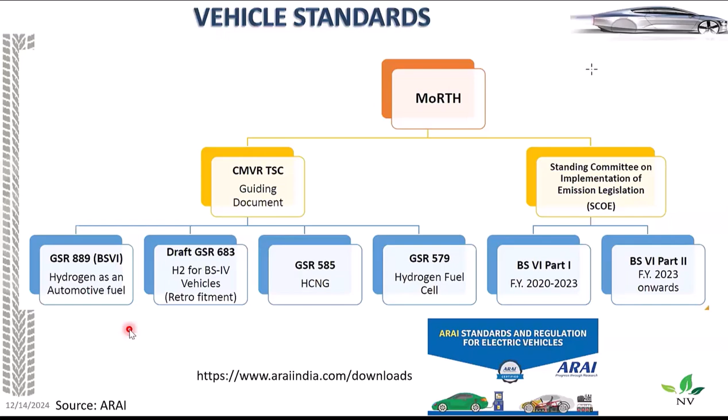In a similar way, on the safety side, ARAI has given standards for everything, including retrofitment, HCNG, fuel cell if you want to use it, or an ICE engine if you want to use it. The legislations are available, which means that if anybody develops it, the government has a standard. If you fulfill it, you can sell it to the public. That's the key message. So if the standard is fulfilled, vehicles are ready to sell, and they will be commercially available. Yeah. So it's not that simple.

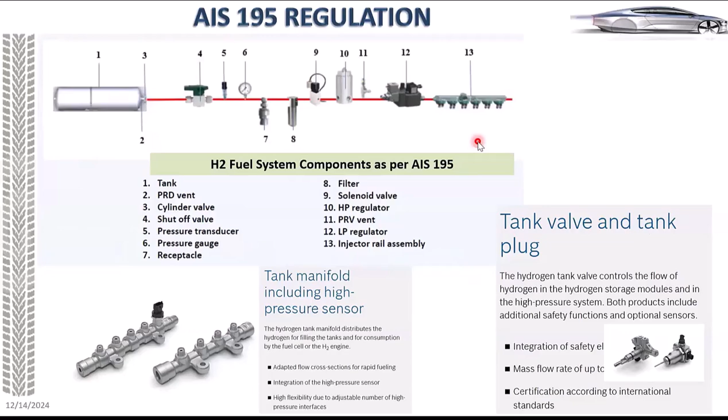There is a legislation. This says that if I have a tank and it comes to my engine, you can see there are 13 components along the way. So this is how safety has been taken care of. If anybody fulfills it, the product is ready. As I told you, the Reliance vehicle which I saw running has these 13 components already inbuilt. So safety is ensured, and in future, if it's ready, I think it can be productionized. So for each component there are safety requirements and legislations. As I told you, if you type AIS 157, you'll get all those things already available. But the key message is every component has safety and legislation rules and regulations available.

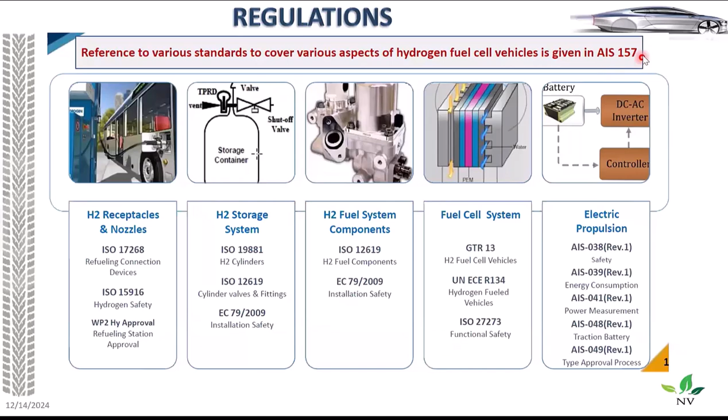Please, if you work on it, adhere to that, because if you want to make a powerful product and it doesn't fulfill AIS 157, your research or your study or value proposition is not going to help. Yeah. So we spoke about storage.

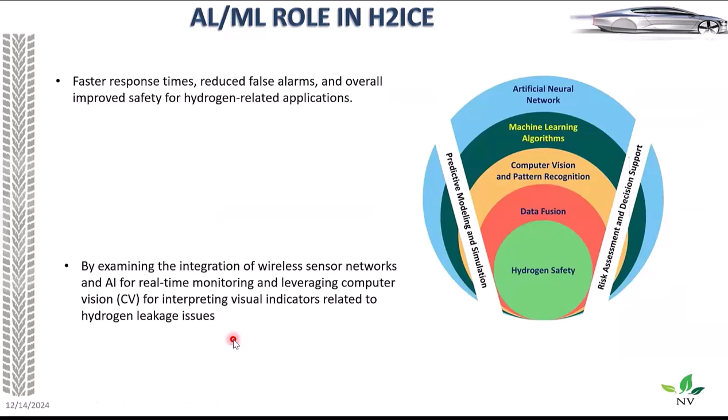As I told, today we are working on machine learning models for safety purposes. Safety in two cases: one is the storage of the vehicle, and we are using the same learning models also for the combustion or DOE, basically for combustion optimization, monitoring the engine safety.

So what I see in future is lower powered vehicles initially may be running on battery, and can change over to hydrogen. Medium power vehicles will be hydrogen, probably CNG or fuel cell. Bigger vehicles will be with H2ICE, which is hydrogen powered internal combustion engines. And we may be predominantly with green hydrogen. If green hydrogen cannot meet demand, we may be with, say, gray or blue.

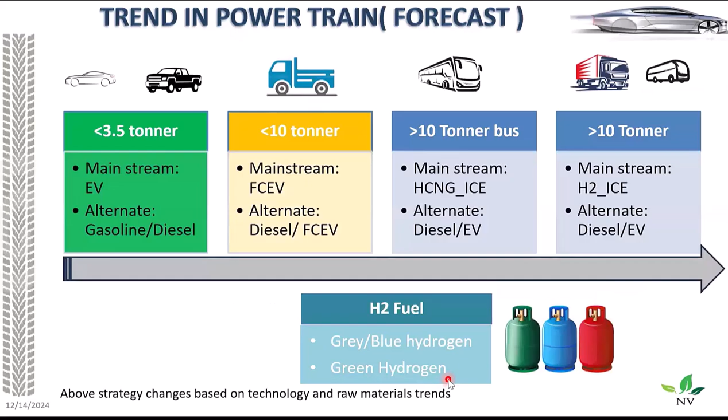Okay, so 10 minutes. I will skip some topics. If you have questions, probably we'll go from there. If you have 5 minutes, we'll take one particular task of machine learning. Probably I will take another 2 minutes to complete it.

The last one. So now, let's say we have engines. Assume it's a 4-liter engine with 4 cylinders, which means 1 liter per cylinder. You know, any engine we produce cannot be produced without tolerance. Take this particular example: this engine is a 4-liter 4-cylinder, and assume the first cylinder is machined so that it's exactly 1 liter, but there's a tolerance of plus or minus 0.1 liter.

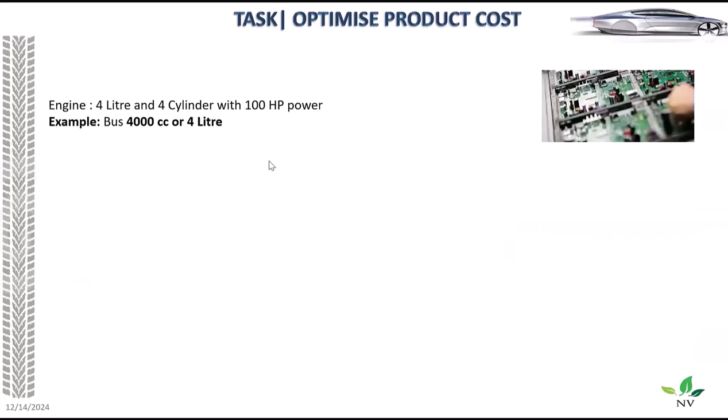So assume we have a 4-cylinder 4-liter engine. Ideally it should be 1 liter for each cylinder, but because of today's machining process, we have a tolerance of plus or minus 0.1 liter coming from honing and other processes. So now the target is that my engine should have equal power coming out of all the cylinders, which means if I have 100 HP, each has to produce 25, 25, 25, 25.

But in this case, because of the engine size, probably this one will produce 25 HP, but hypothetically this may produce less than 25 HP, let's say 23 HP. This is a practical scenario. The short question is, if I want all cylinders producing equally, I have to come out of these variations coming from the engine.

Let it be a diesel engine or a hydrogen engine, in future we speak hydrogen. It should not be that, because of higher calorific value, one cylinder produces perfectly what is required for BMEP while another cylinder produces low or high; that is very dangerous. The question is, how do I make all cylinders produce equal power so that the engine is very stable? Probably in the query session you can reply, but if somebody has an answer, you can tell how I can come out of this issue.

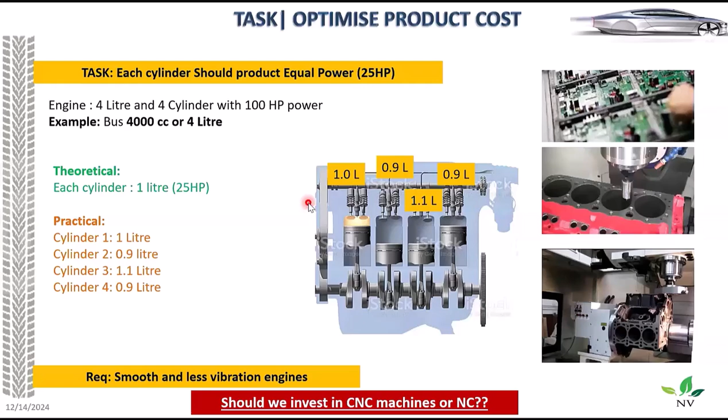Because hydrogen has 3 times higher calorific value, a small tolerance is going to be 3 times larger for hydrogen compared to diesel and petrol. How can we solve this? Any opinion or idea how we can come out of this issue? Okay, quickly I will cover it.

So what we can do is study or take sensor data from the engine, which is a flywheel speed or crankshaft speed sensor. We can understand from the signal. We can develop a learning model taking the sensor data. Based on this data and the cam and crank profile, we can see from 360 degrees of rotation which particular cylinder is producing power.

If a cylinder produces 1 liter in my direct injection engine, I don't disturb it. If this particular cylinder has 0.9 liter or is producing lower power, we can try to optimize the fuel just by the model we have. We don't invest, for example, in machining of all the engines. Let's say, assume per year I'm producing 1 lakh engines.

I cannot invest in a costly process or a strict tolerance, which is going to make my production costly. We can take electronic control along with machine learning models, and we can come out of this issue. So this is where the world is looking: building or using electronics and machine learning models as one of the use cases to come out of this particular higher calorific value tolerance issue. Because we are experts in engines, we see this as one of the budding areas for improvement.

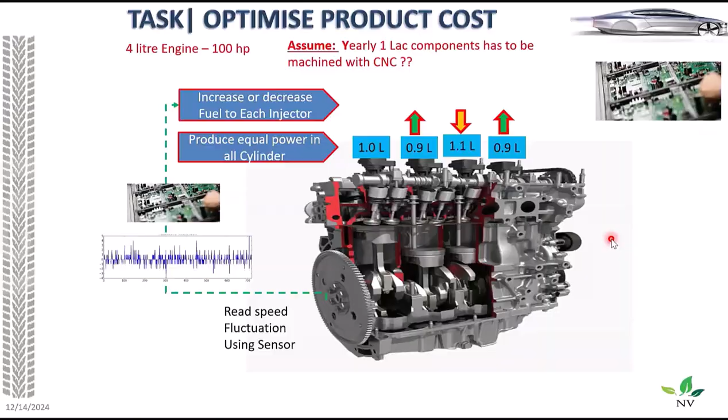Sir, I am Perichiyappan, consultant. I have one question, sir, regarding railways. They are doing heavy duty. Are they employing this geared engine, or like the 4-stroke engine you have shown? In Germany they have made a hydrogen-powered engine. Are these engines like this only, or something else? It's the same principle.

In Europe, there are hydrogen-powered trains running in a pilot project. It's not a full-fledged project, but they started running it. Okay, because ICF is also going to start now. Correct. Integral Coach Factory has already made one coach in India, ICF Perambur. The reason behind this, as I told, is the government push. In all segments they are trying to push hydrogen as a fuel because it's technically possible. It's only a matter of development. Okay. Thank you, sir.

There are 2 questions in the chat box. One is, can the amount of fuel supply be regulated? Amount of fuel supply, as I hinted today, the regulations mostly come from the electrolysis point, and it is only in a closed environment, like government projects, NTPC or state governments running it. So in that way it is getting regulated. And now an AIS process has come to say how the fuel has to be supplied, what safety things should be available, what the mode is, and what the basic license fee is if somebody has to do a supply chain. This is still evolving because only a draft is available, but in principle it should be more or less closer to what we do today for CNG.

There are a lot of automotive standards, AIS, that have come. If you remember, I presented close to 20 legislations. Mostly the main challenge is the combustion and controlling the supply coming from the tank to the engine.